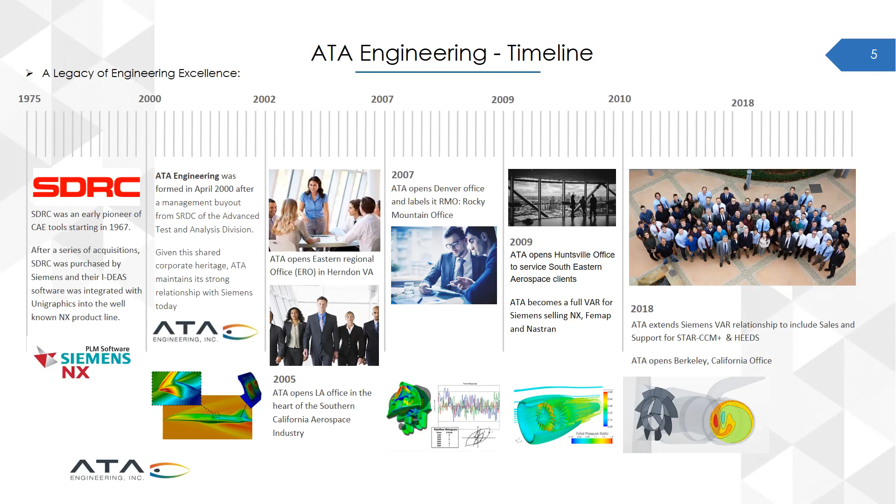Since then we've grown steadily, and now we have offices throughout the country, in really the key parts of the aerospace industries mainly. We do a number of things: one is we do testing for really any kind of aerospace and structural problems. We do ground vehicle testing and vibration testing for large structures, looking at modalities and things like that. We also do design, and we do analysis with pretty much all of the Siemens, mostly Simcenter tools, to do advanced CFD and advanced FEA. So we tackle the whole spectrum of things across the industry.

Here are our locations: headquartered in San Diego, with offices in San Francisco, Denver, Huntsville - which is a big one for us - and then Albuquerque and Washington are our other offices.

Key to that is that we're also a Siemens Platinum partner for value-added reseller, which means we resell many Siemens products, including STAR, HEEDS, NX, Femap, and many others. We also support them, consult with them, and more recently we're starting to teach classes for all of those as well. Siemens have been changing the landscape a bit over the last year, asking partners to start doing more support and more training for all products.

We've done NX and Femap for many years, but for STAR and HEEDS and some of those, it's new for really everybody. As clients, you know the website is a great resource where you can go and pick up new information about Siemens and ATA. So I urge you to revisit that from time to time.

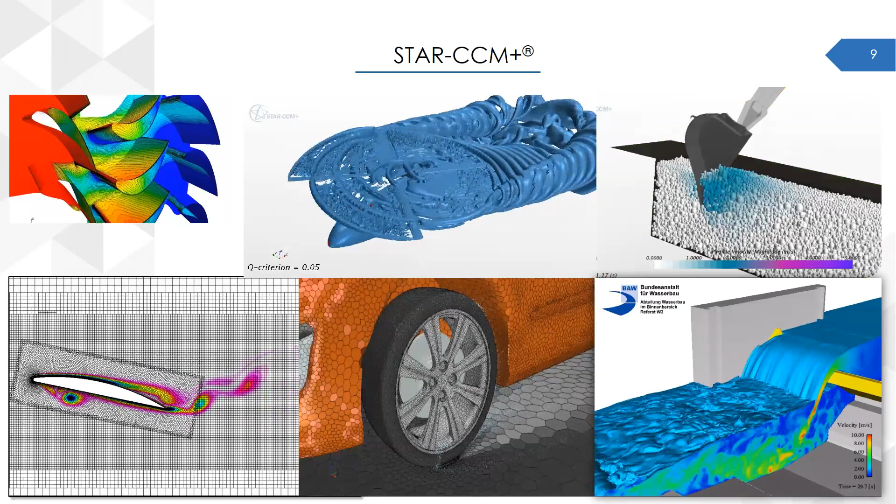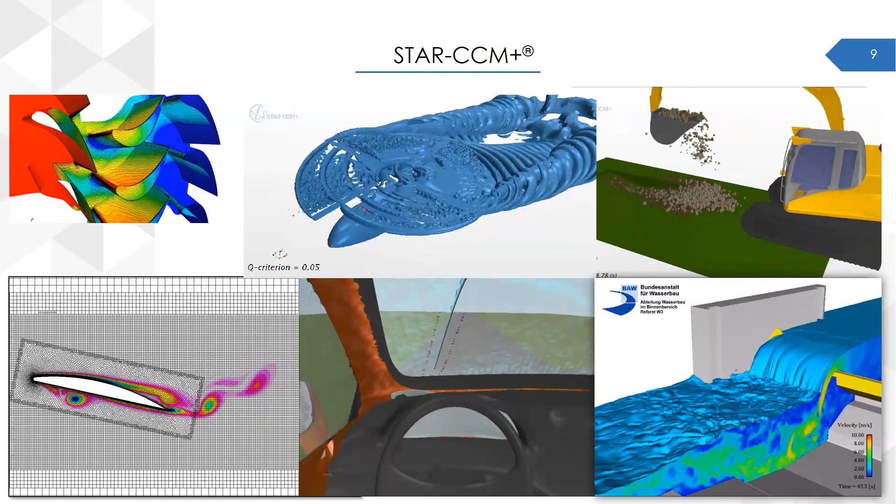If you look at most of these videos here, not all of them, but certainly this one, and really all of them to start with, the camera is mostly always in the same place. Most videos that people create with CFD are looking at transient flows, loading in multiple transient data sets, but keeping the camera angle the same. That was straightforward, but this one up here, where the camera's moving around, is a lot more elaborate, and was quite tricky to do in STAR.

If I go to the next slide, you can see what I mean. This is a regular video of an osprey, and it's fantastic in terms of the data it gives you. But when you look at this, my first thought is, wow, that's fantastic, but I'd love to be able to spin around and look at the back of it, to see what that flow is doing around the fuselage at the back, and maybe the rear wing and so forth. As a static image or scene, just animating the data, you can't do that.

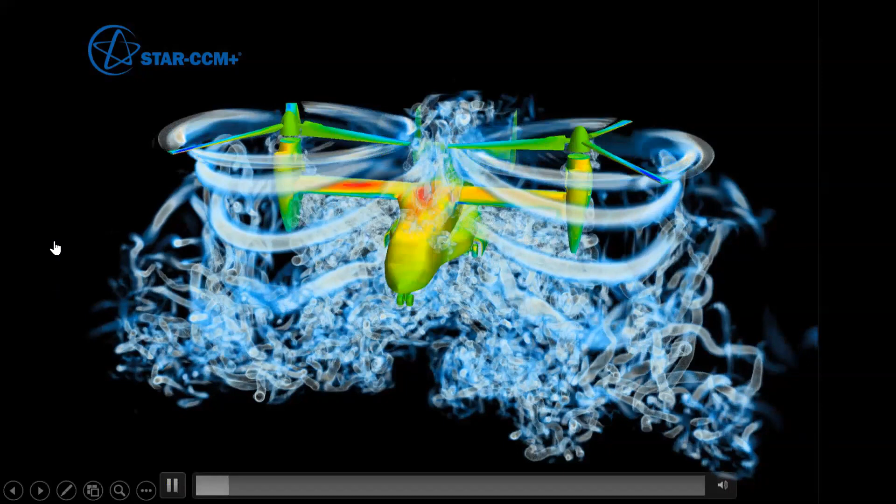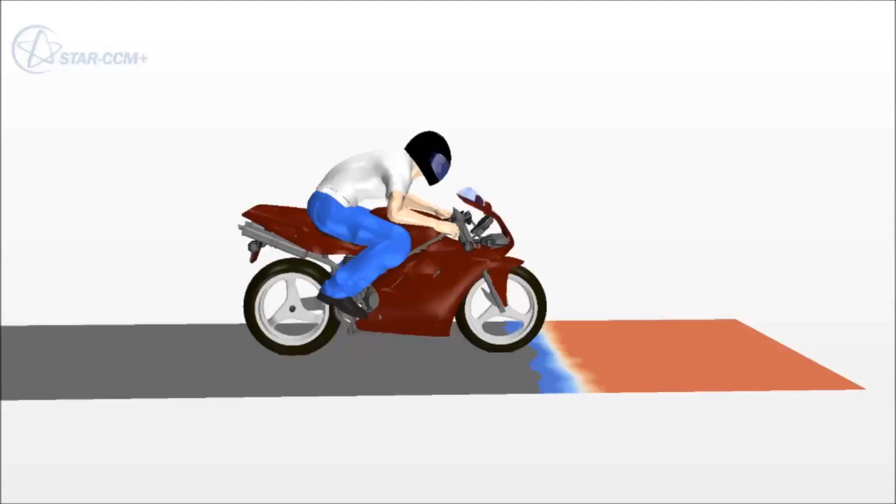Nonetheless, STAR's been able to do this for a long time from the GUI. But if you really wanted more camera flexibility, you needed to turn to Java. And this is a video that I actually created about 5 years ago when I worked for CD-adapco.

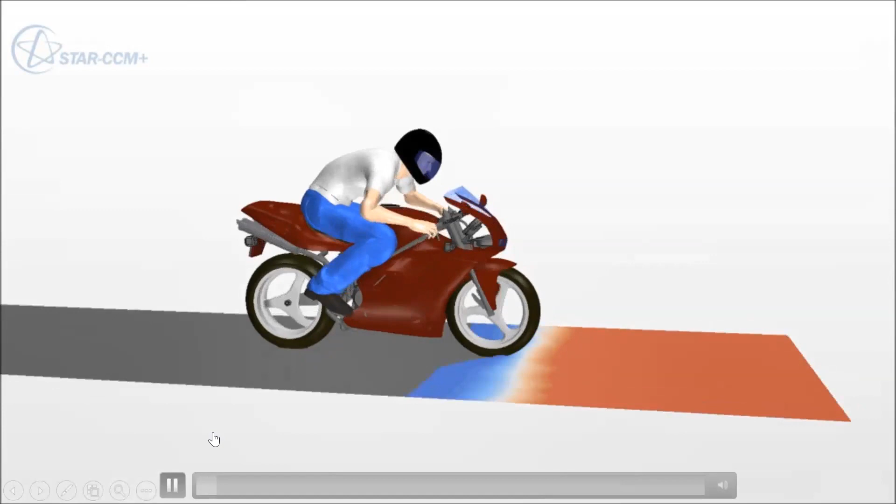This is a motorcycle coming up to some water. The wheels go around, and the water gets picked up by the tires and thrown around. But the difference is that the camera, simultaneously to loading in all of the transient data for the model, also rotates around the rider. I think you'll agree the rotation adds a lot of value to the simulation, so you get much more depth, much more understanding of the process. Instead of a static view showing the same data, you get this rotation.

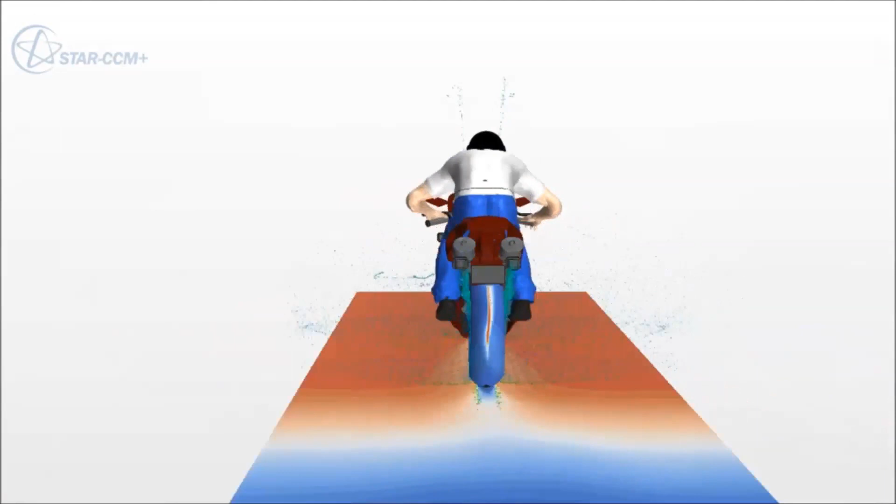Now, if you wanted to do that in STAR from, say, 3 years ago, you had to write a lot of Java, and sit there for probably 2 hours while it read in each data set, churned out the pictures, and created the animation. So now with Screenplay, that's going to be a lot better.

I think that sets the scene as to why you need Screenplay nowadays, instead of using Java and other tools to pull out exactly what you want, and needing to become an expert at all of those things. Screenplay opens it up so that hopefully everyone can use it from the GUI and get much more professional results.

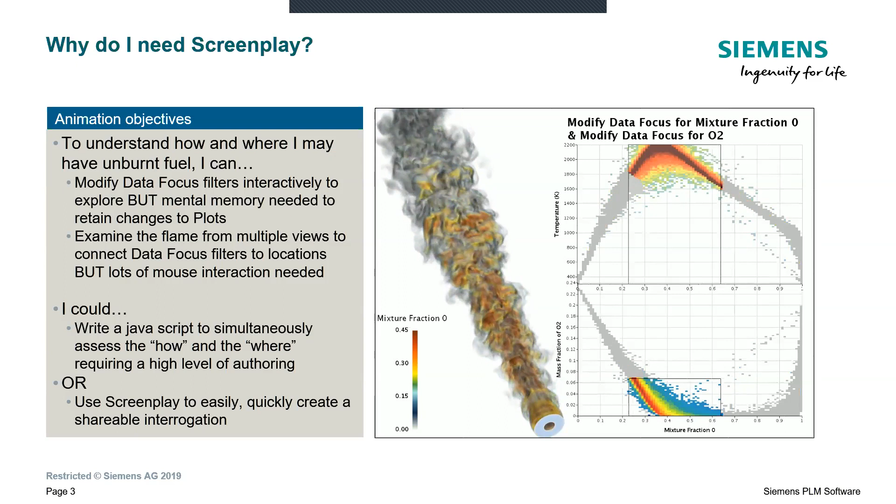So you can very easily and quickly create shareable animation. This particular Screenplay was fairly basic to set up. If we have time, I can show you what the storyboard looks like for this one at the end. But that's the idea, that's part of the motivation.

One of the reasons why we want to use Screenplay is to grab the attention of your audience. You can do some neat things with an animation, communicate real abstract ideas, and if you've got a good concept in mind, you can actually do some nice simplification of complex concepts.

In the animation on the right, we're looking at a mixing tank, and we're using massless particles to track the flow patterns in this tank. There are actually three subtle things going on here: the particles show the flow, but we're also contouring the pressure on the baffles in the mixing tank at the same time, so we can see how that changes. That's at least two layers of information. There's also subtle motion to zoom in on the impeller blade as we pass back and forth, and the last little hook is to spin this in reverse.

The idea here is that you can make an animation that's memorable. It's arguably something of a Hollywood effect, but when you unwind a flow pattern like this, it might give you some additional insight into what's actually happening. So that's part of the idea with Screenplay.

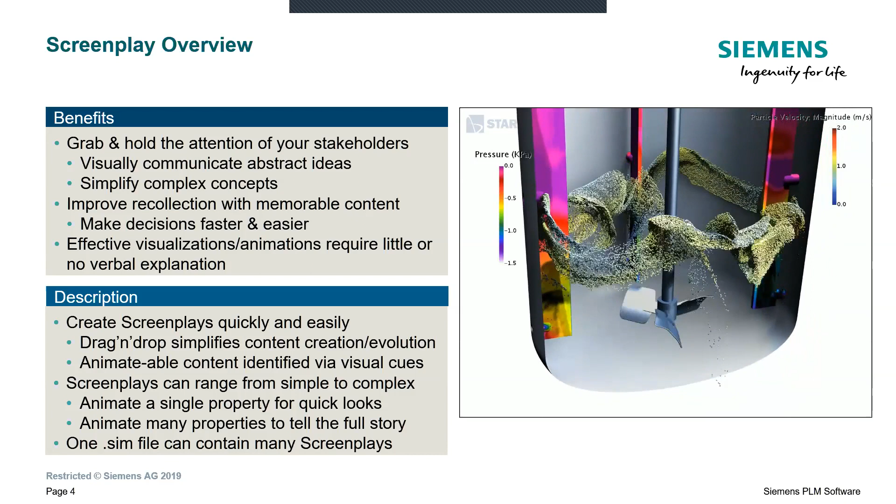An effective visualization is a lot like a good joke. If you have to explain it, it's not a good joke. And if you have to spend a lot of words to explain a visualization, it's not effective. That's another thing to keep in mind when we compose these things.

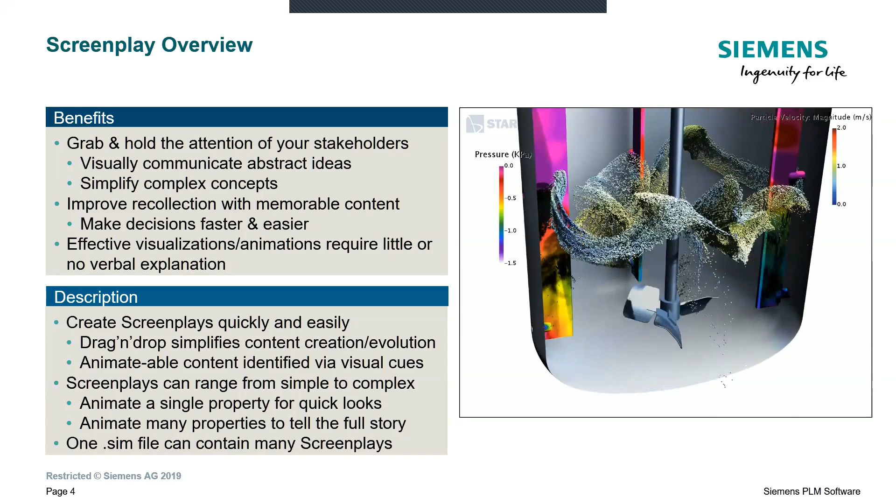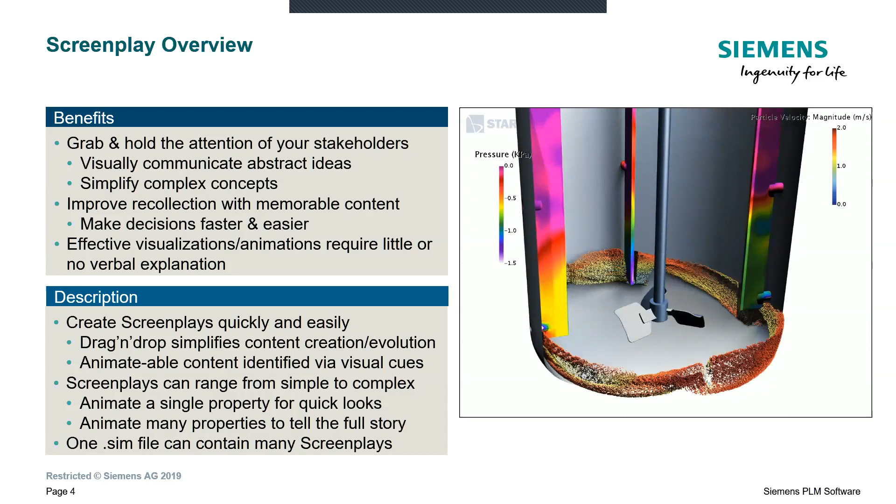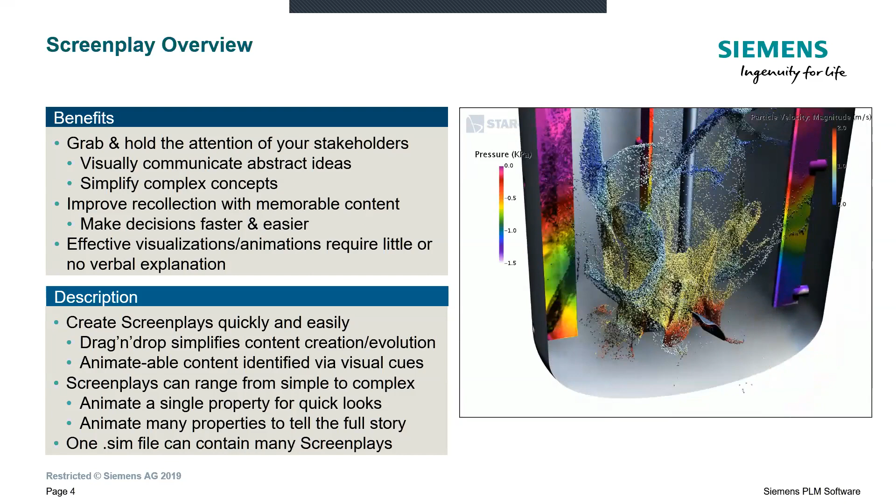Screenplay lets you do simple to complex things, with different levels of animation. I want to stress a point here: we're not going for Hollywood. We're going for the effective communication of engineering results to show value. Yes, it helps if things look appealing, but that shouldn't be your motivation off the top. If you can communicate a simple thing with Screenplay, that's a success.

To set up the discussion and give you a glimpse of how-to, I want to walk through a little bit of taxonomy. What you see at the bottom of the screen is the Screenplay UI. Screenplay is something associated with the scene or a plot, and we use it to organize actions. This UI element at the bottom is really the container, or the storyboard, for your screenplay.

Within that, you can define actions. The idea of an action is that it defines when something starts and when it stops. So if you think of stage directions, if you're looking at an actor you want to direct to walk into a room, they have to open the door first before they go into the room. That's part of what actions do—you can sequence things, and that's the idea.

Next up you've got the keyframe sequence. Within the action, this is the thing being interpolated. In the previous animation, we were interpolating through transient simulation or solution histories—saved data for different time steps—and we were also interpolating a view back and forth. This keyframe sequence lets you independently define where you start and where you stop in terms of your interpolation.

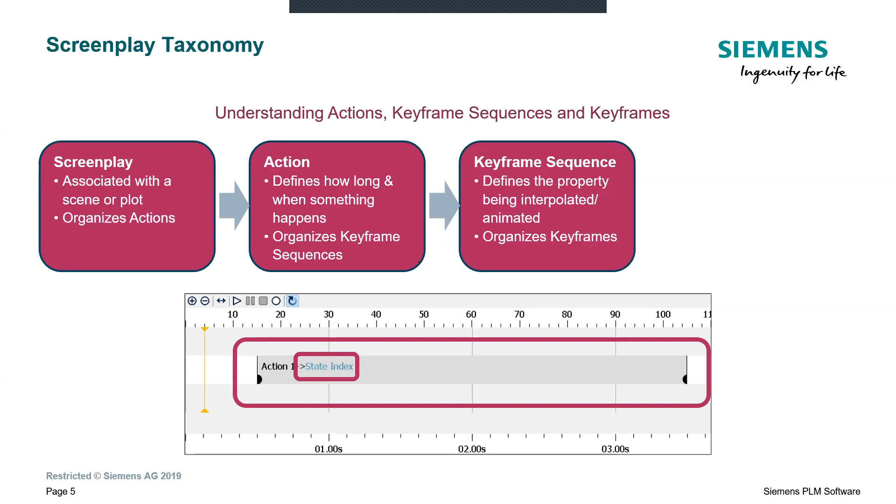Within an action, you can actually have multiple keyframe sequences. The keyframes are the endpoints, so start and stop at the end, but you can also add intermediate points. So inside this action, you can make something more complex in terms of how it gets interpolated.

There's a time cursor inside this UI—this vertical orange-yellow bar—and you can use it to scrub back and forth between the sequence. So you don't even need to save an animation to get value. You could bring a colleague over and just grab this time cursor to go back and forth through your interpolation, to explain abstractions or complex concepts. Of course, there are also the basic play controls and save-out-to-file formats on this UI as well. So that's really the basis for it.

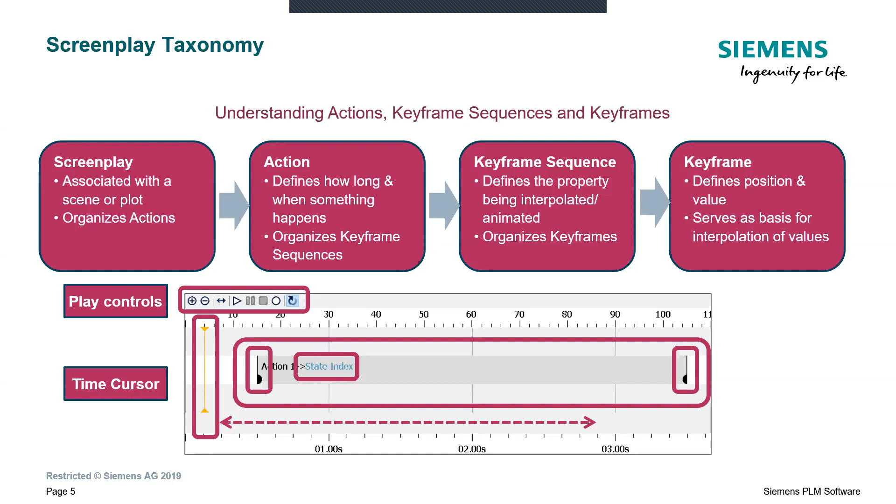In this sequence, I want to walk through a very basic pre-recorded demo. And here's how it works.

Starting on the tree, you would navigate down to the entry called Screenplay, and you're going to associate a screenplay with an existing scene. You can actually keyframe things outside that scene as well, but you need to anchor it to something.

Now I've got 3 solution views here, which represent collections of transient data, and I want to animate those. What I do is grab all 3 of them and drag them right into the Screenplay UI. There's a hint there on what you can animate, and that shows up with an orange highlight.

Once I've got these in, I can use my interpolation points to establish the range over which I'm going to interpolate. In this case, I've got 360 steps that I want to interpolate. Here's the scrubbing action I described, where I can simply drag this slider across and look at how this screenplay animation evolves very quickly.

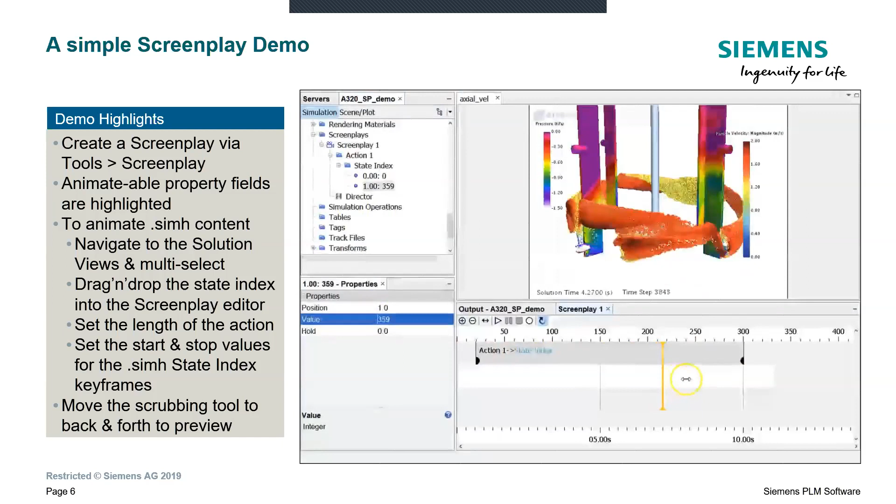So it gives me a way to preview or interrogate what I'm setting up. That's really helpful when you're trying to set up an animation to say, all right, that sequence maybe needs to be longer, it's not quite lined up with other sequences. So instead of having to rewrite JavaScripts to line things up, you can do it interactively.

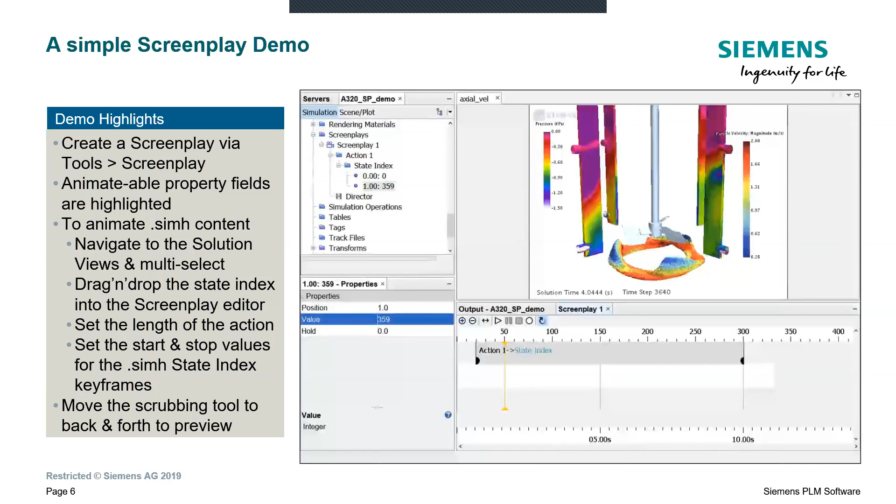So let's move on to some of the deeper level how-tos here. What I want to show is a series of what I call one-action wonder screenplays. From the UI, if anything's got this orange highlight, you can grab it and drag it straight into the Screenplay storyboarding tool. So I can just pick any one of these things and pull it straight in.

In this particular example, I've grabbed opacity, or the transparency. In the animation at right, what you can see is a sequence where I'm ramping this opacity down from being fully opaque to fully transparent.

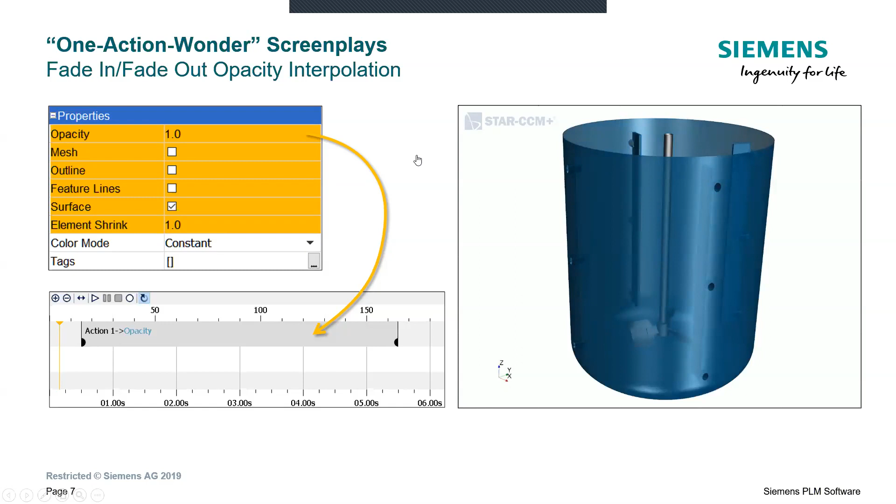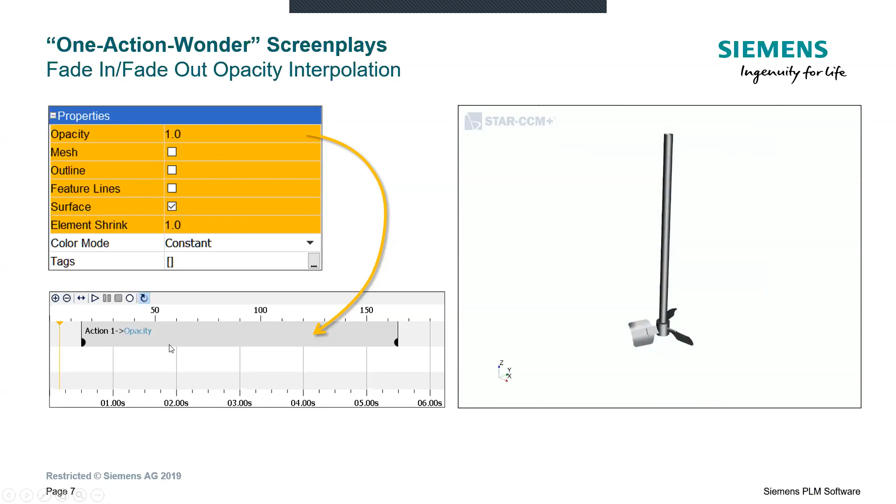It's that simple, and I can interactively change the length of this sequence by dragging. I can introduce delays by moving my keyframes within that bar itself. So it's very interactive, and again, with the scrubbing tool, you get the immediate feedback.

So let's break this down a little bit more. In this particular screenplay, I've got this action with opacity. Now, if I click on this, it brings me back to the tree, right to the place where this action is. The screenplay in this case is named Fade In.

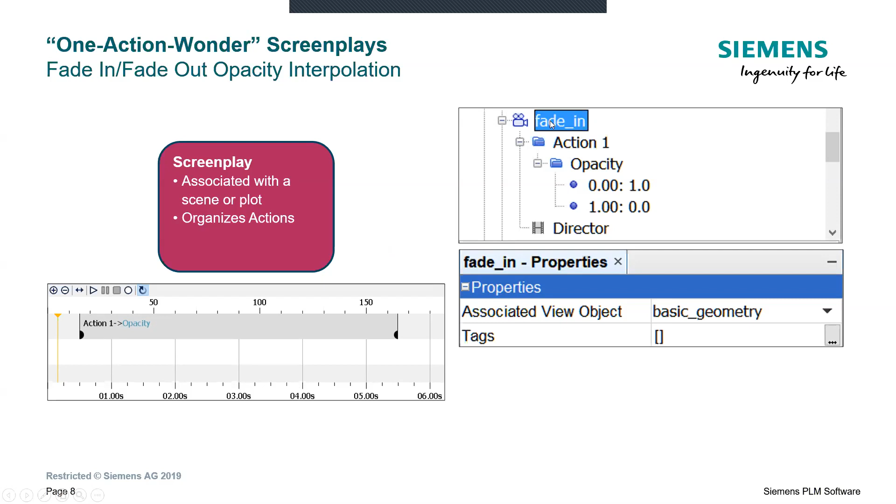I can click on the action here, that word right there, and that brings me to the action of interest. This is really helpful for navigating if you've got more than one action in this keyframe sequence.

So I click on that, and that directs me to a point in the UI where I can now assess or change some of the properties. I can change things like the time at which this starts and the duration. I can also turn it on and off, so I may want to preview things and then turn them off just to save time and get the storyboard together.

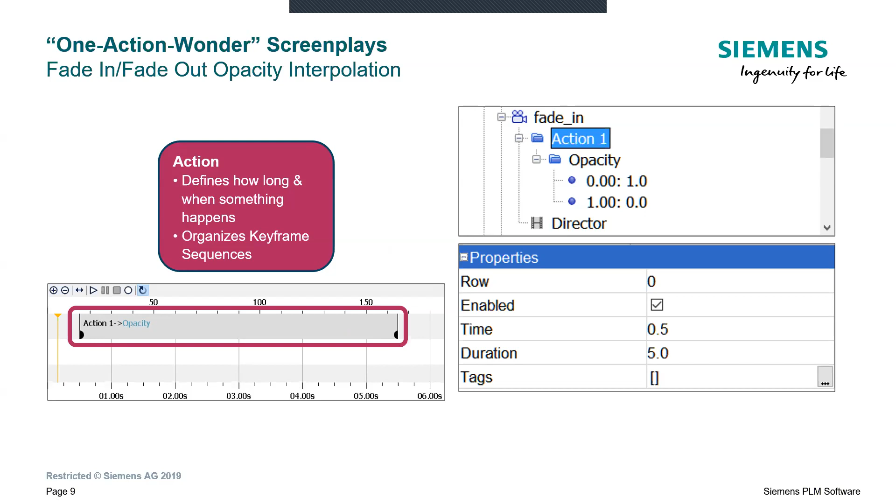Next step, I click on opacity for this particular keyframe sequence. It drops me down into the properties. Here is where I've got the anchor to the tank wall, which was the thing that we were changing the opacity on. I've got options on how I do my interpolation.

I can repeat that, so I can run it as many times as I want to set. So there's some basic controls here.

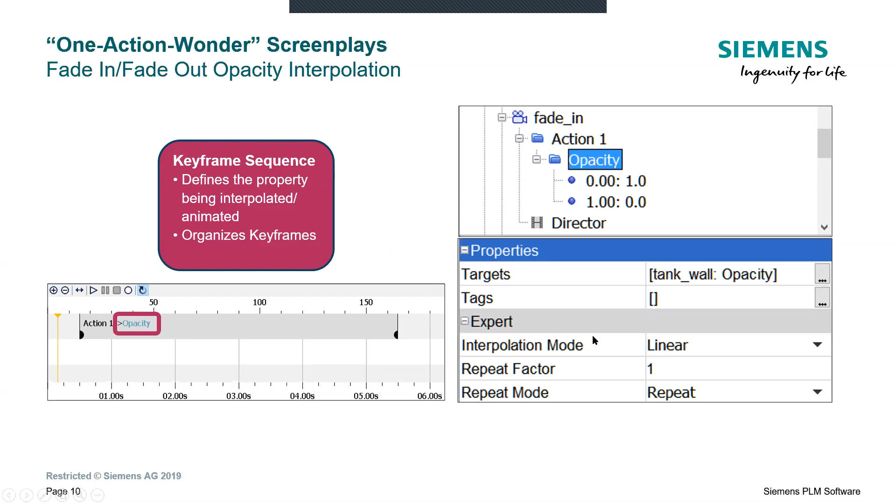And if I click on one of the keyframes now, I actually go to the properties for those. Here I can set the position and the value. The position is non-dimensional, so you don't need to worry about setting an exact time. You only need to worry about how you're going to interpolate. The value in this case for opacity is set to 1, so that's fully opaque.

And if I go to my end keyframe at this point, I can click on that, get to those properties, and say, all right, at the non-dimensional length of 1 for this sequence, I can set the value to 0.

So I can quickly set up these properties just by navigating back and forth from the screenplay UI element, right back into the tree to set up the properties. And again, this is a big time saver.

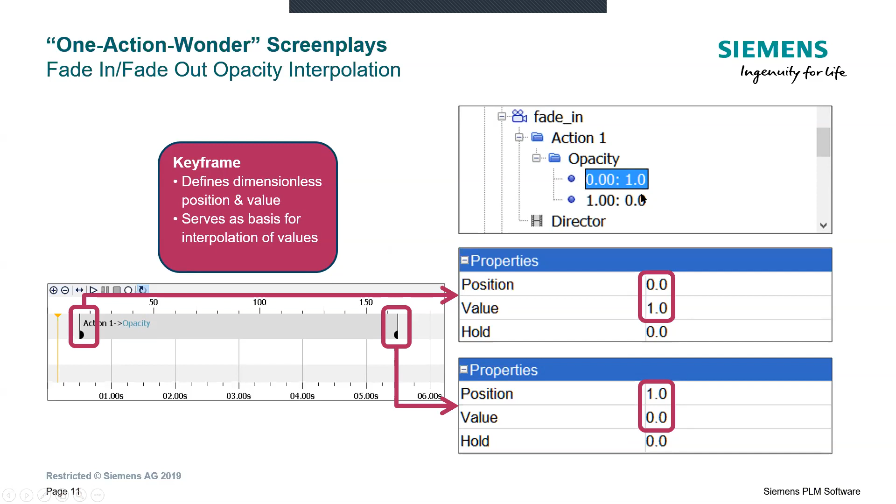Another good one-action wonder, just a single sequence keyframe, is being able to change the view. View interpolations are hard if you've ever had to write them from Java, and it's hard to make them smooth. So within Screenplay, I can just grab the view and change the entire view, bringing that entire block of coordinates in, where I can focus on one of these to manipulate the view.

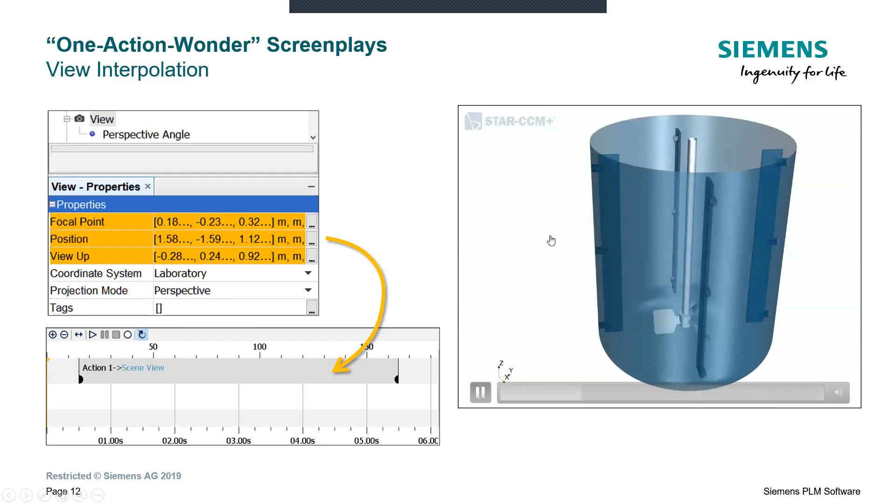What's easy is just to say, all right, I've got a starting view. Let me grab that and save it as the property for this keyframe. Let me interactively move this object to the next position and just save the view with the right mouse click and drop that into my second keyframe. So I can interactively create a moving sequence very quickly.

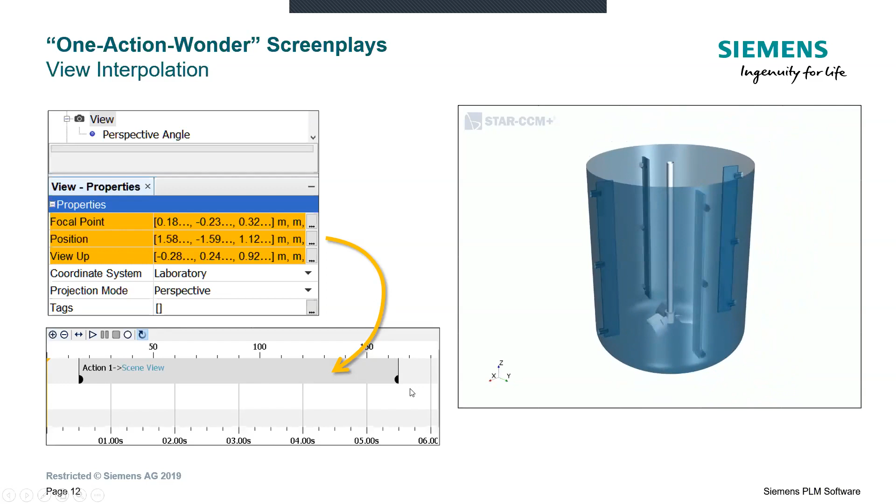Another common one-action wonder is just being able to spin an object around. Again, with the osprey at the beginning, it would be great if we were able to set up something where we could just turn that around. So we start with a front view and then go aft to look at the stern.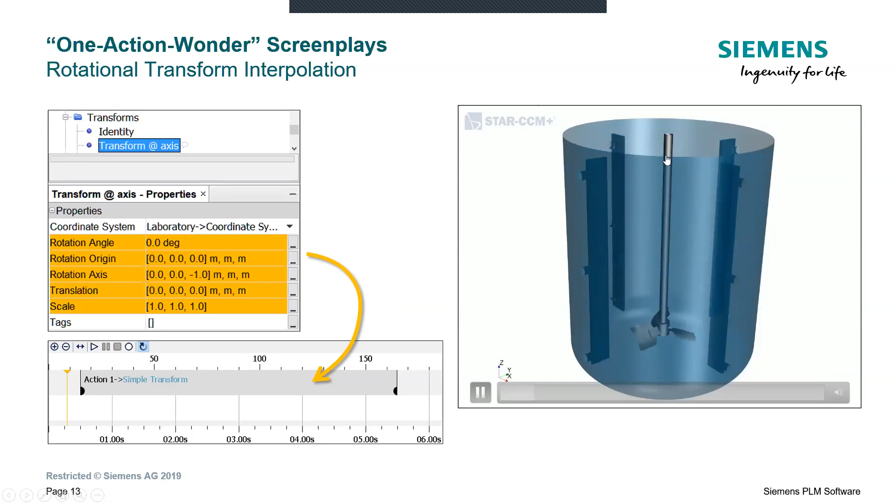In this case, there's a bit of a trick. What you need to do is set up a transform, and the transform is actually the thing you're going to animate. Within the STAR-CCM Plus tree, this would be the object that's highlighted, and you could just drag this in. So in this case, I want to spin it around, so I'll define the rotation angle, and within that transform properties, I'll set up the rotation axis so I can spin it right around this mesh axis. The way you set this up then is inside your screenplay, we've got a rotational transform, and in this case we're modifying the transform of the object.

A different interpolation mode here: you can choose something called spline. What that does is a technique called ease in, ease out. So when you start the interpolation, it starts off slow, picks up to a constant speed, and at the end of the sequence it slows down again. This gives a better animation effect for certain operations.

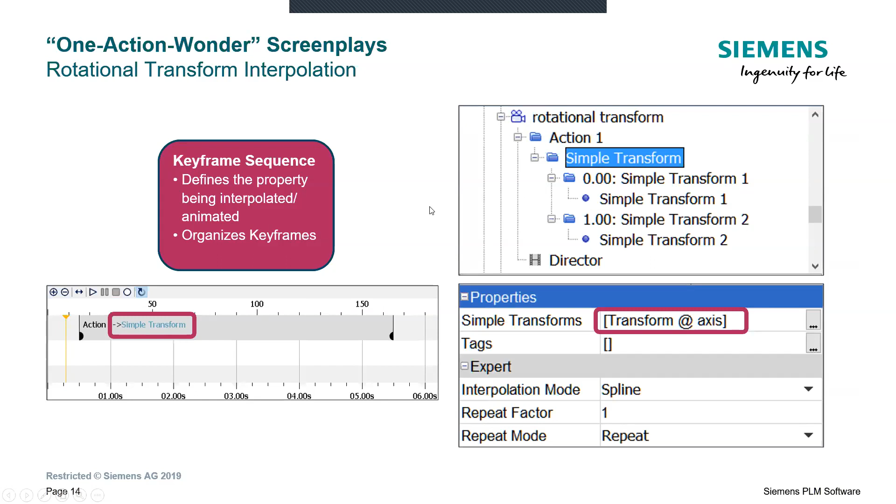So when you change that transform, that's part one. The second step is then to apply that transform to all the displayers. So in the animation that we showed here, everything is spinning. I've got a displayer, or many displayers, to which the same transform is applied.

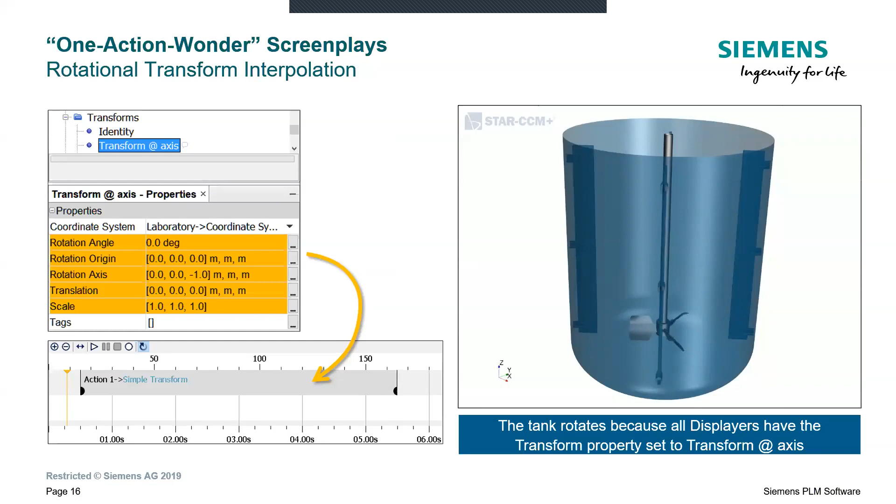Now let's contrast that with, and here we go again, we see the entire tank rotating. Let's contrast that with just wanting to move the impeller blade. Now this is a transient simulation, and so we've saved the results in our solution history file. In this case, we can take the solution view, drag the state index right into our keyframe sequence, and then animate that.

There's a handy trick here, a bit of frame rate math. If I want to save my animation out at 30 frames per second, and I want the duration to be 6 seconds, that means I need 180 SimH states to populate that. If I don't line that up, then you can see some starts and stops as the interpolation tries to make its way through.

The likelihood is that I probably know my SimH states. So after I set up my frames per second, all I need to do is specify the duration with this simple relationship. And again, that applies to our SimH or solution history because these do have integer representations for each state.

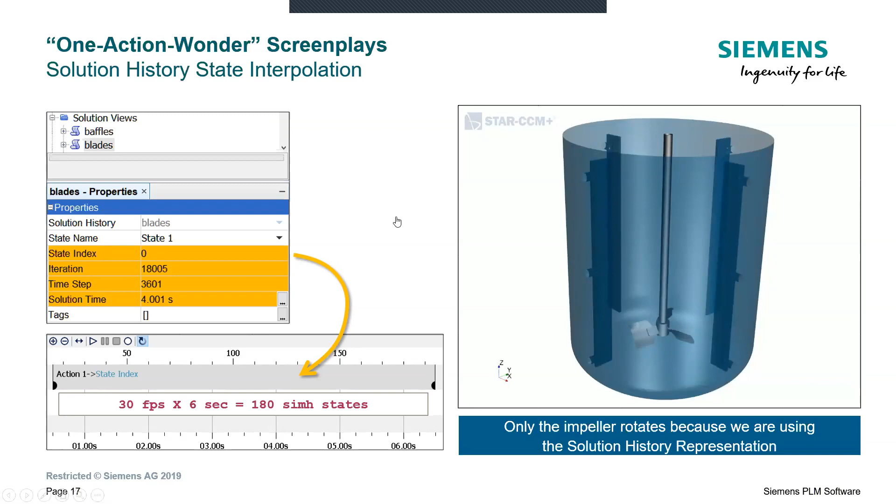Another good one is being able to sweep a cutting plane. Very common thing that you'll want to do, and there's actually 3 different ways to do this. One way is to just grab the origin of that plane, pull it into the sequence, and animate that. You saw this particular surface go from bottom to top.

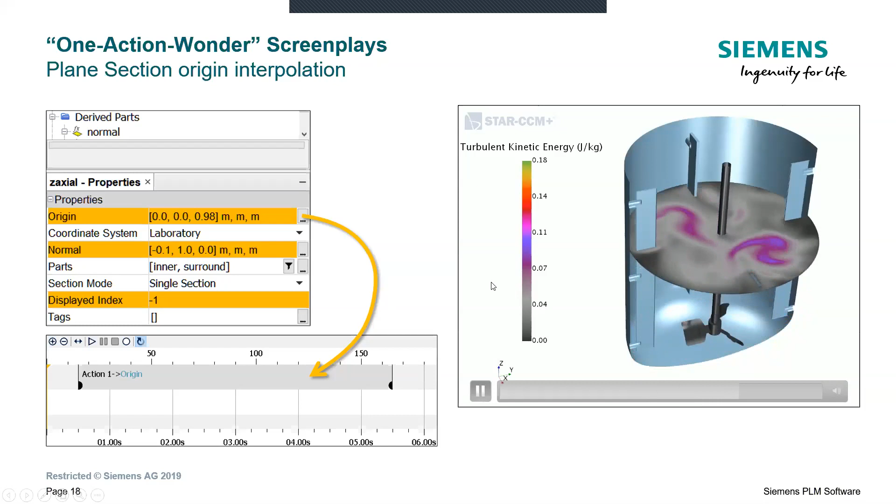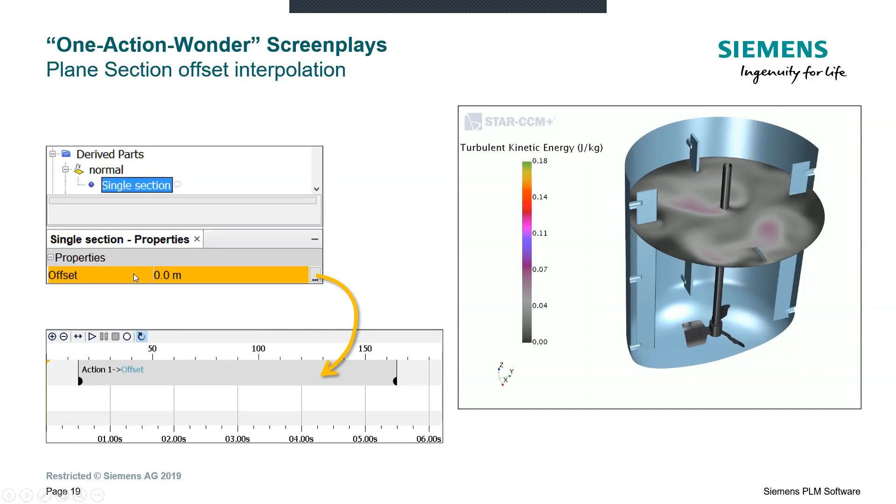There's another way to do it, and that's animating the offset of that derived part. So instead of looking at the origin, I'm just grabbing the offset, and it's exactly the same result. There's no difference between these two. It might be easier if you have multiple planes to just manipulate the offsets, so you might want to combine all of those different derived parts in a single keyframe sequence, and that's still doable.

The last piece is that maybe you've already set up a scene animation for your scene, and you can grab that scene animation and pull that right into your keyframe, and again, exactly the same result. So there's more than one way to do this, and the intention is to capture different workflows. Some people might have a preference for using the scene animation approach, and we've tried to support all the modalities to be able to do common actions.

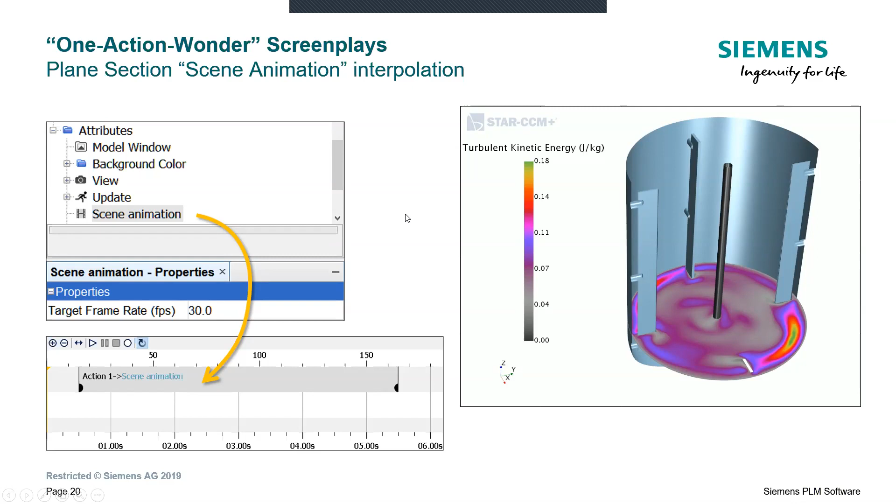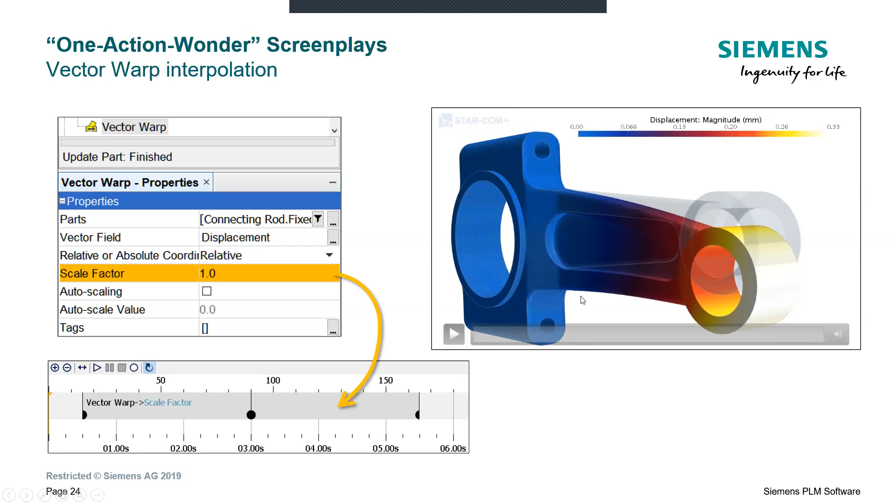And what's really handy here with Screenplay is you can say, okay, that scale factor is too big—let me back that off to see if I can get something that's not absurdly deforming and still tells the story of what I'm trying to show.

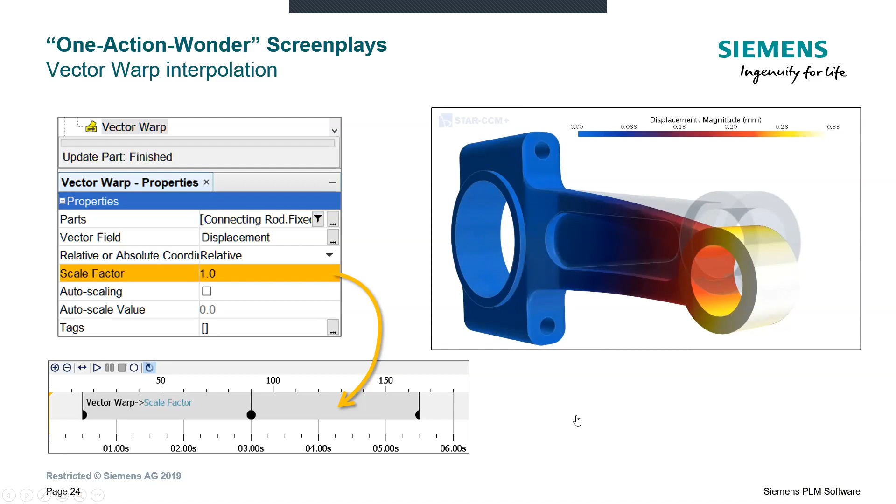So those were a handful of what I call one action wonder, simple screenplays. Again, I want to stress it's important not to lose the value of those. You can whip these things out in a matter of minutes and have an animation. So instead of a bunch of pictures that you'd use as hard copies to post in a report, you've got something that's a lot more vital.

So I want to now step on to what I would call multi-action screenplays—there's more than one thing that's going to get animated at this point. A good example to show here is an exploded view or an assembly view.

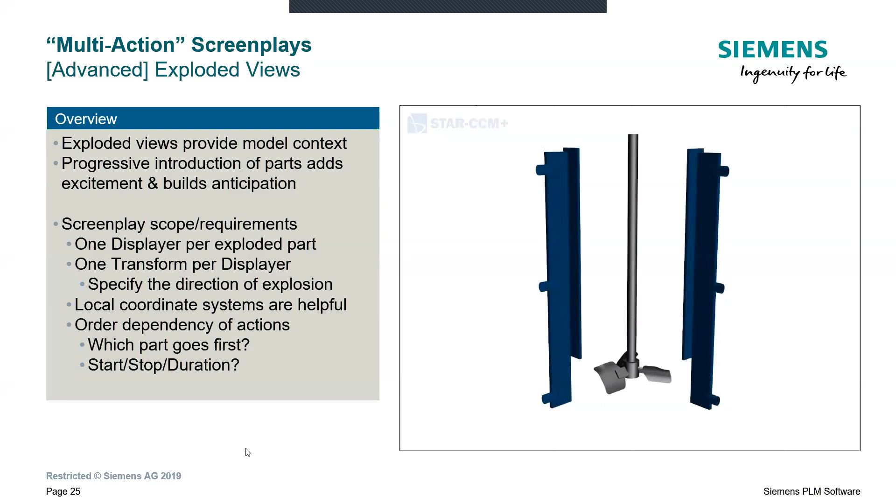In this case, we've got the mixer shaft coming together. We show the mixing blades for this impeller. We're going to bring in the baffles next, so we'll show those in context to the geometry, and lastly, we're going to bring in the mixing tank. So there's actually a lot happening in this sequence.

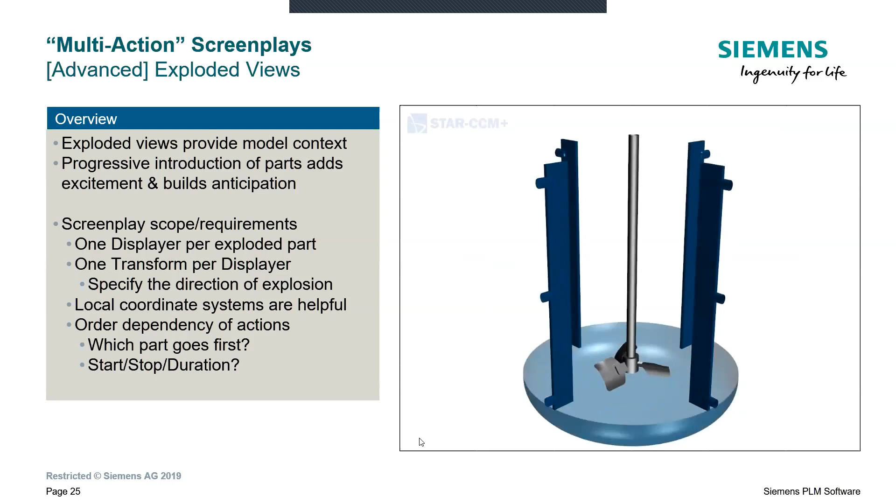From a keyframe standpoint, you have to figure out what you want to happen in what order. So this is an assembly from inside out, starting with the shaft and then proceeding up to the mixing tank wall. When setting up more complex animations, one of the challenges is to figure out which goes first, which goes second, how do I want to set this up.

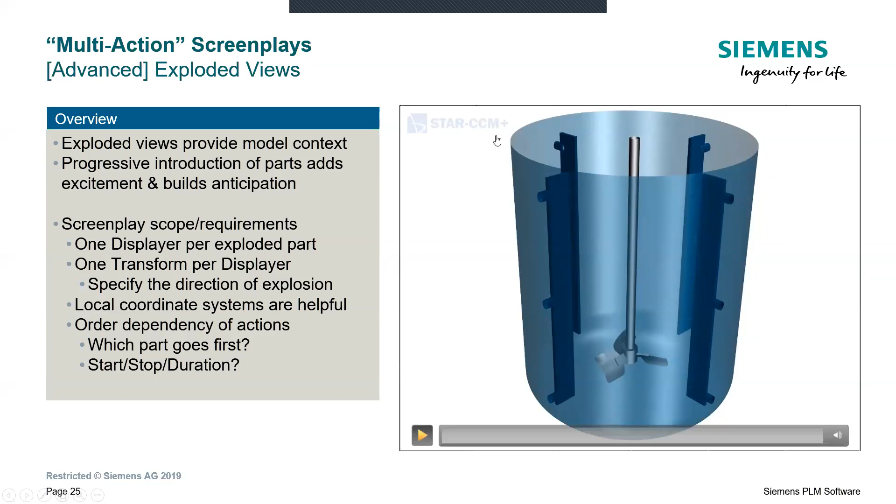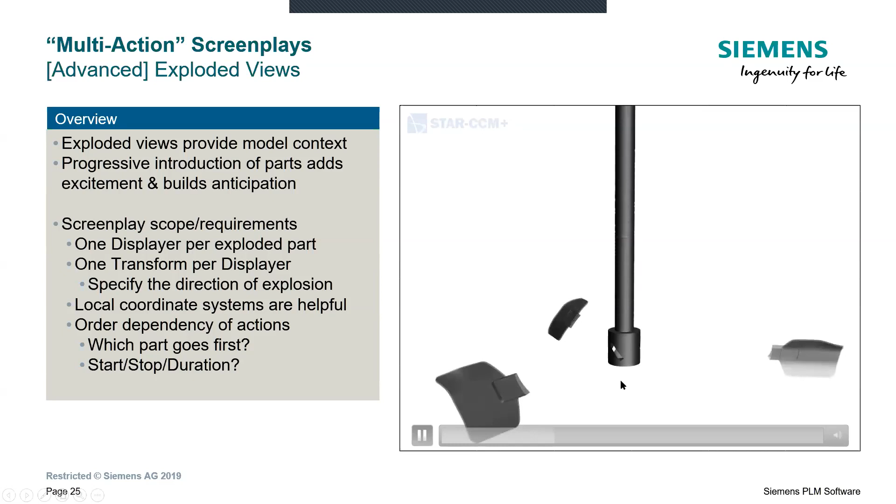Because I've got independent actions for the blades themselves and the baffles, I've got to specify which direction they're going to move in. All the blades, in this case, there are 3 different directions that I need to specify, just for example. Same story for the baffles—they're all going in different directions.

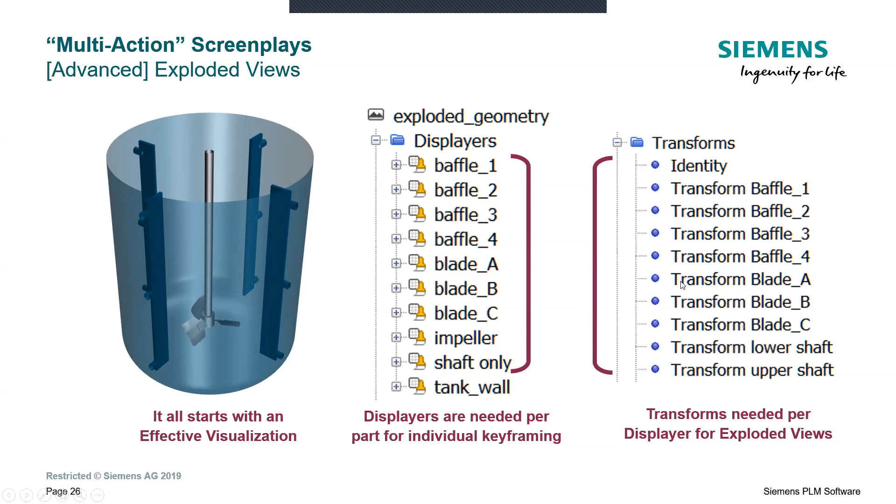So what's involved here? Inside my scene, I'm going to need to set up a unique displayer for everything that has a unique motion or direction of motion. So here's all the displayers: my 4 baffles, my 3 blades, my impeller, and the top part of the shaft. For each one of these displayers, I need to set up a transform to tell it which direction it needs to move in. So there's a matching set of transforms to go with the baffles, the blades, and the upper and lower parts of the shaft. I need to set all those up.

If I look at my storyboard for this particular screenplay, here's what it looks like.

One of the nice things about the UI is you can set up multiple rows in your screenplay. So I've dedicated one row to just handling the mixing shaft, another row to just do the blades, another for the baffles, and the tank wall.

In addition to that, there are some view interpolations that I needed to include. In this case, I can see pretty clearly that the first thing that's going to happen here is a shaft transformation, with a view transform that went along with it. I initialized my blades to make sure the transparency wasn't on until I was ready to turn it on, so that happened here for all those blades. Then I used another sequence to move those to attach to the shaft and so on.

There's a series of sequences in here that I can easily see and move back and forth, left to right, on this timeline to figure out the right order. I can also drag and drop and pull these keyframe sequences across rows as well, so that's just as easy to do. This gives me a lot of editing flexibility.

As I'm evolving this animation, I can always use my scrubbing tool to go back and forth and say, yep, that looks right, I have the order right. So that maybe is a little bit more advanced, but again, with drag and drop, it's pretty quick to set this sort of thing up once you've got a plan in mind of how you want to animate it.

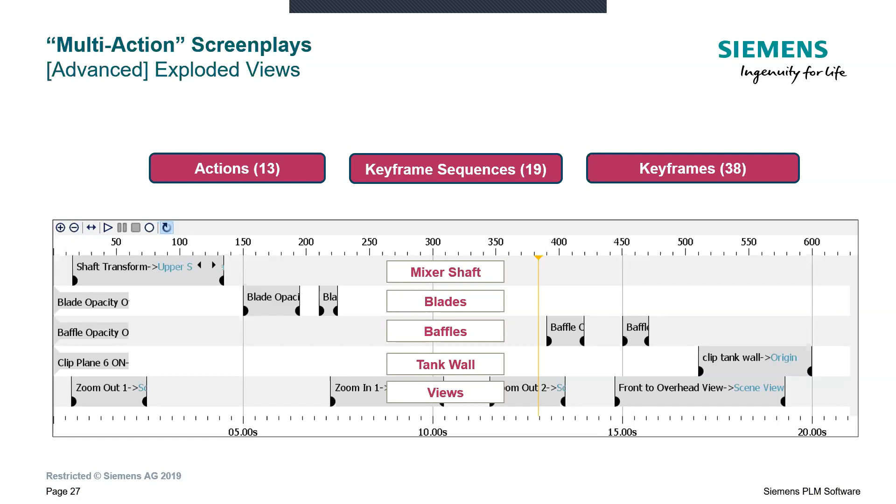The idea here is that I've actually got two scenes, one behind the other. The way this works is I've got one scene getting wiped out while simultaneously I've got another scene getting wiped in. And that's it.

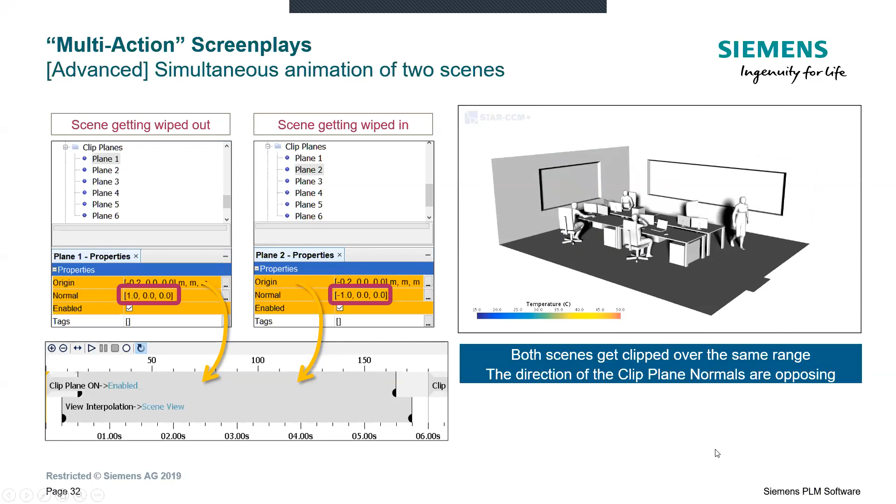So I've got some view interpolations in a keyframe sequence, and the steps to set this up are: I've got two independent scenes, and I'm going to link them together so that any mouse motion in one scene is also applied to the other one. I'm going to create a scene annotation, an image that I can use to place into another scene, and then I add that scene annotation in, and put it in the background.

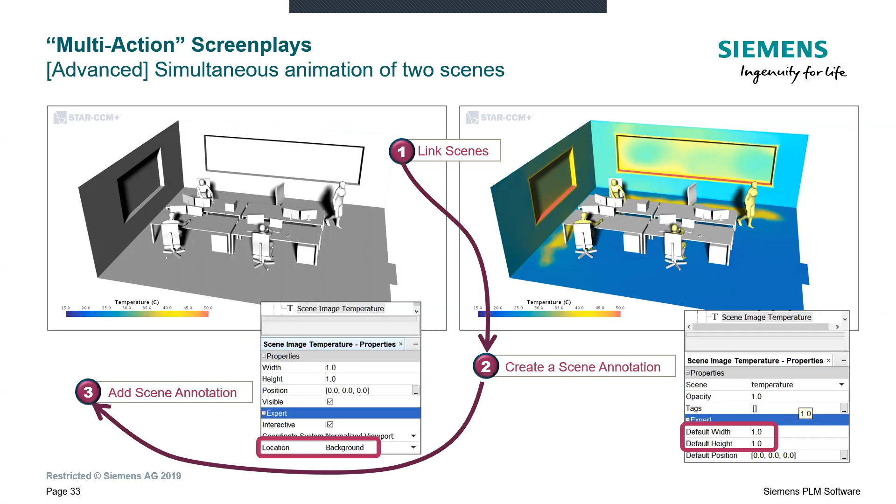So when I want to see what's underneath here, all I need to do is wipe away what's on top. Very straightforward, and it's kind of a nice animation technique to do a progressive disclosure here—you're revealing information by layers.

In this case, one of the tricks here is showing how you can do more than one object within the same keyframe sequence. Again, I can just click on that, and this selector object or dialog comes up.

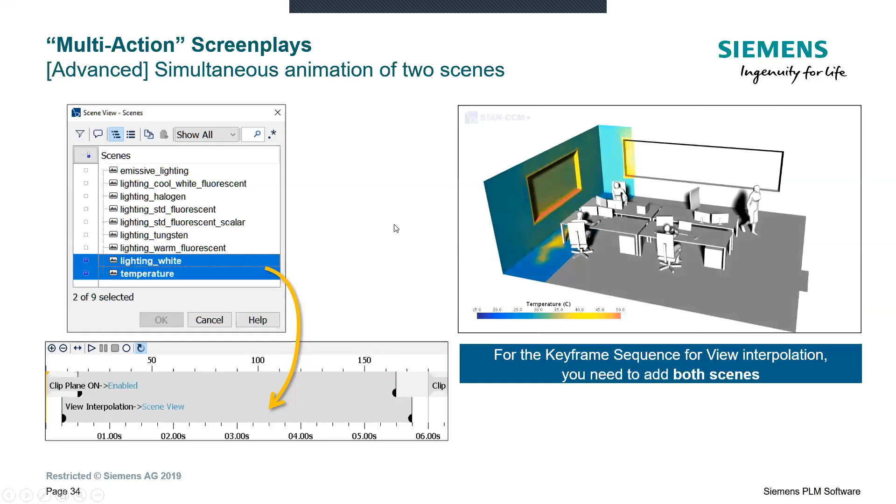I can pick the two scenes that I want to link inside this view interpolation and just drag and drop them in. So we do need to have both of those scenes set up so that they move in sync as I'm doing the wipe—that also includes the interpolation. But this is the entire sequence here. So it's a bit of a sleight of hand, but it's, I would argue, a very effective visualization.

Next thing I want to show is something a little bit more advanced, and that is how do you get a car to roll down the road? The trick here is that you essentially move the road. So I can set up a transform, set up a translation, and just drag that in—this is part of the keyframe sequence for this animation that you're seeing on the right.

There's actually two view interpolations here. I'm looking in one direction down the road while the road is moving essentially right to left, and then there's another view interpolation.

So we can see that as we go down the road, there's essentially a pan and zoom kind of effect.

Discussion question: why did I translate the road by this precise amount, 120.64 meters? Just because I wanted to see the duration of 60 wheel revs, like how far would a car get down that road. So if I don't have a road or a car on the road, I can do this arbitrarily and figure out in advance how I want this to look.

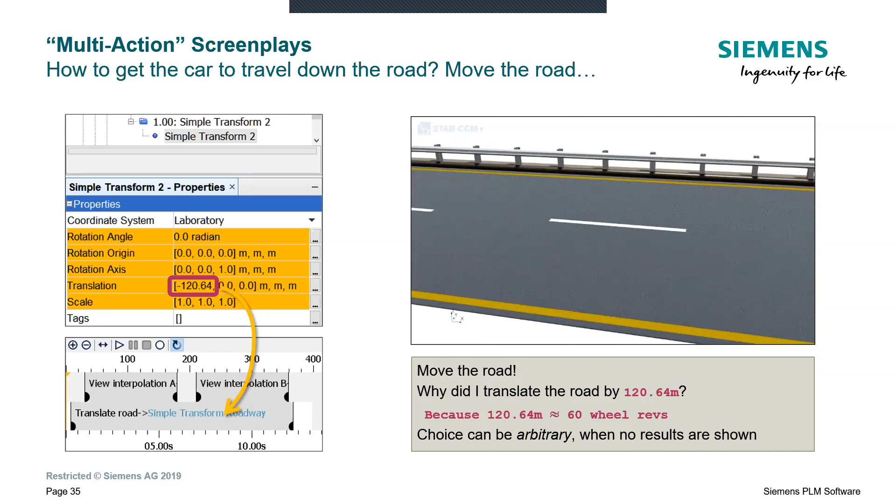Now in this particular case, I've only got 4 full wheel revolutions, and I know that I've got 2 degrees of rotation for every state, and I've got 720 states. So similar to what I showed earlier, I've got a number of states in my solution history file. I pick a frame rate, and then that lets me calculate a duration.

So in this case, I could write out an animation with the maximum time of 24 seconds. And that's kind of a best practice recommendation because it makes the animation look smooth, right? So the choice here is driven by the temporal fidelity, or how many states or steps I have in my time history files. But this is a good suggestion on how to set this up. As long as I maintain integer math here, that works.

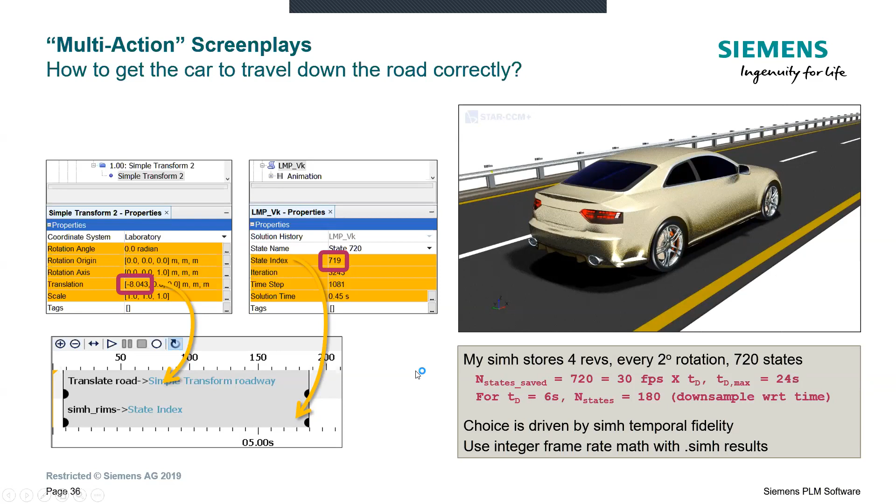So if I want to go for a faster animation, let's say I set the duration to 6 seconds, I'm actually downsampling with respect to time. So again, that gives me another way to speed things up or slow things down as I need. So ultimately, what you end up with...

Is something like this. So this is a case where I've got a lot of things happening in this particular example. I've seeded massed particles, essentially dust particles, inside the wheel wells here. And we're watching the fate of those particles as the wheels turn. I could show just that animation without the road, but I think it's a little bit more effective if you see the car on the road.

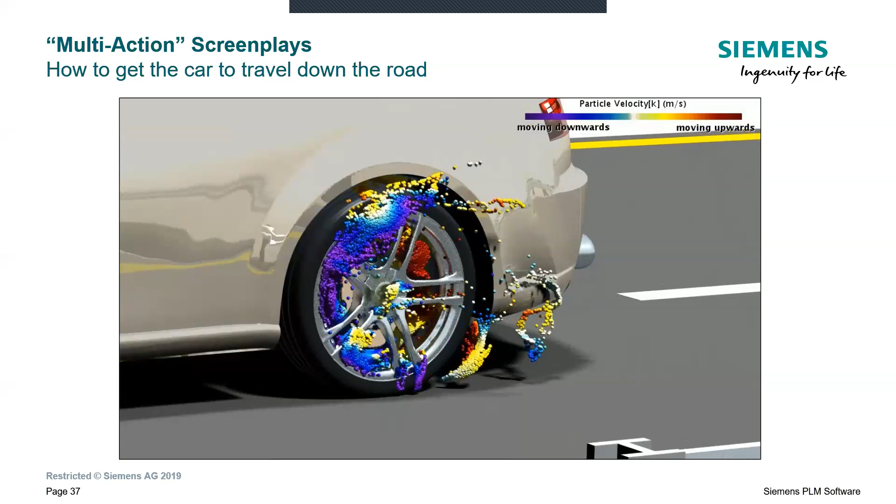And you can pick up a lot of interesting information. There's a lot of visual cues, depth cues, so you can see reflections of the guardrails on the car surface. You can see the emissive lighting used on the taillights to make them look a little bit more realistic. You can see the shadows of the particles on the road. And that can actually be used to infer things like periodicity, how far apart these particles are as the vortex shedding occurs down the road.

So in this example, there's layer upon layer upon layer of information. But again, with Screenplay, I've got the ability to be able to move things around, set them in sequence, and give what I hope is a very effective visualization of the fate of these dust particles in and around the wheel rims and the wheel wells.

And Adam, I think, I hope I'm on time here. So I'm going to wrap up. What I want to say... You're, yeah, okay, that's perfect.

Thank you. So, excellent. So my closing comments here: screenplays need some planning, but I think what's most important is to start with an effective visualization, just to be able to communicate results.

Storyboarding is a good way to plan out what you want to do in terms of your animation, so I would encourage the use of that. I think the UI is well suited to do that.

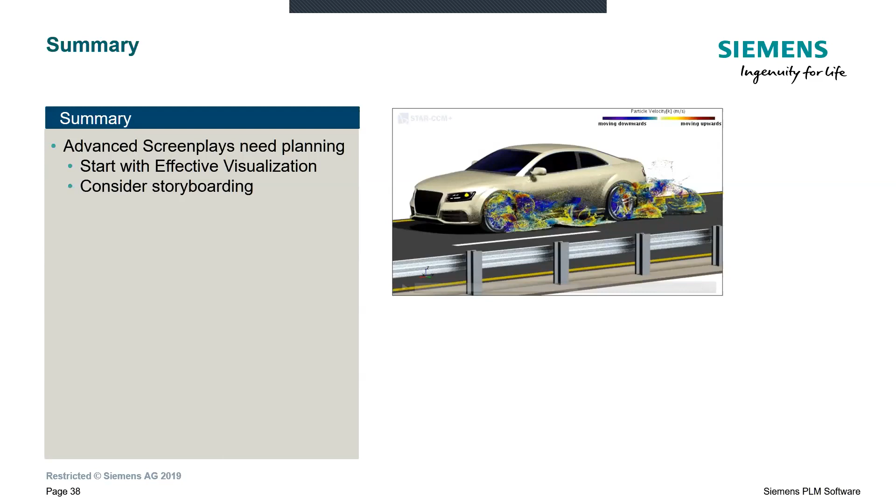Don't forget the easy stuff. These one action wonder screenplays can let you do a lot quickly. And scrubbing can give you a quick way just to preview and gather trends, so you don't even need to think about saving these results. You may just get insights by just being able to interrogate with your scrubbing tool.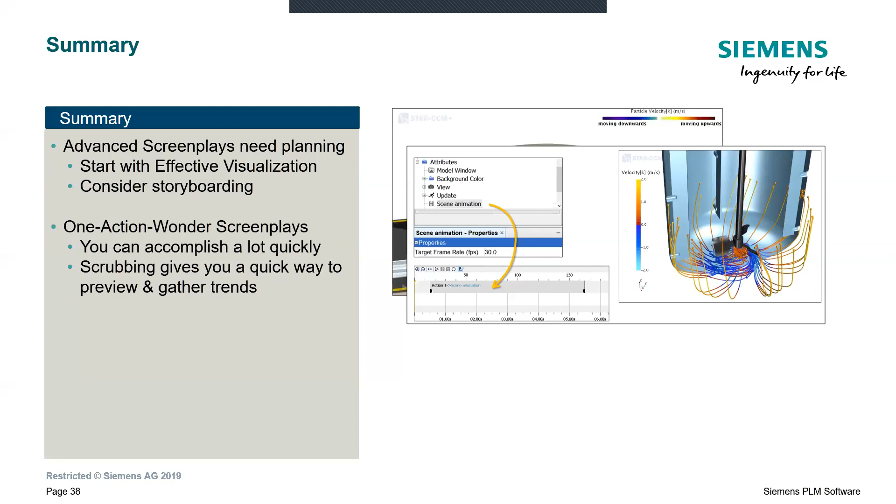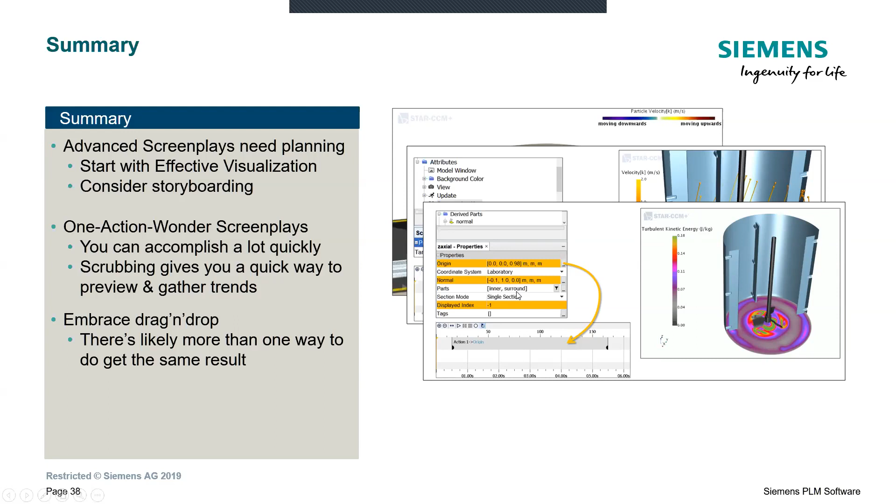There's drag and drop enhancement all over the place. If you're familiar with the STAR-CCM Plus UI, you know there's a lot of UI mouse miles running up and down that tree. We've tried really hard to minimize this and to make it very obvious what you can drag into that screenplay editor with the color cues in the UI. So it's different from how other things work in STAR-CCM Plus, but we think it's a step in the right direction.

And lastly, I think it's kind of good to keep in mind the basic taxonomy here. For some of us, it's brand new, and it might be a little bit intimidating, but I think with a little bit of practice, you can get the hang of it.

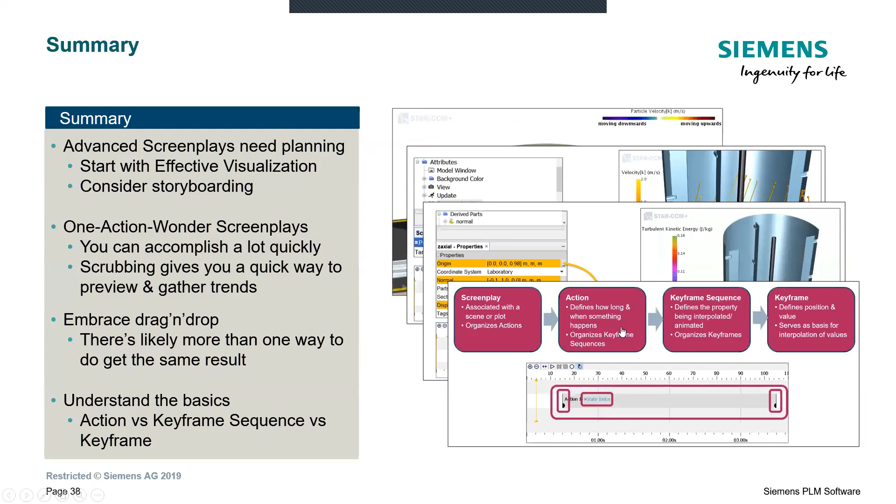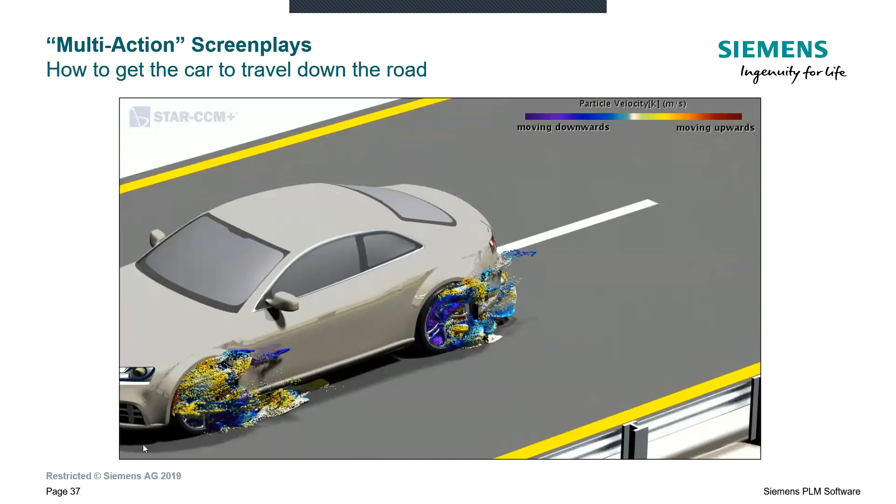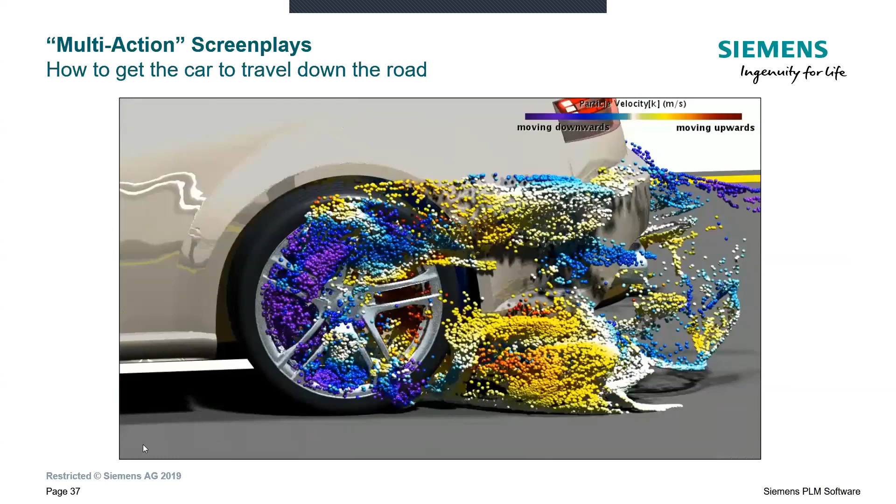The way this would work, the screenplay is actually designed to not run simultaneously while the solver is running. We found we had some technical challenges with that, where we couldn't maintain state, and with interpolations, you need to be able to set a start point and end point. So the way I made a lot of these animations was I ran the solve first, and I had, in my case, solution history files, which are small. Even for this case, it's transient data, but I didn't render it to take time away from my solve, so I just used the solve to generate this. I can rough out the screenplay on my desktop and figure out what I want to set up, but the solution histories are sitting on the cloud. So then it's just a matter of running the screenplay in batch with this content already computed. That's the one thing to be aware of. Similar to animations, you go into wireframe, kind of a fast render mode, just to rough it out and get the right feel, and then you send it back to the cluster to do the full render.